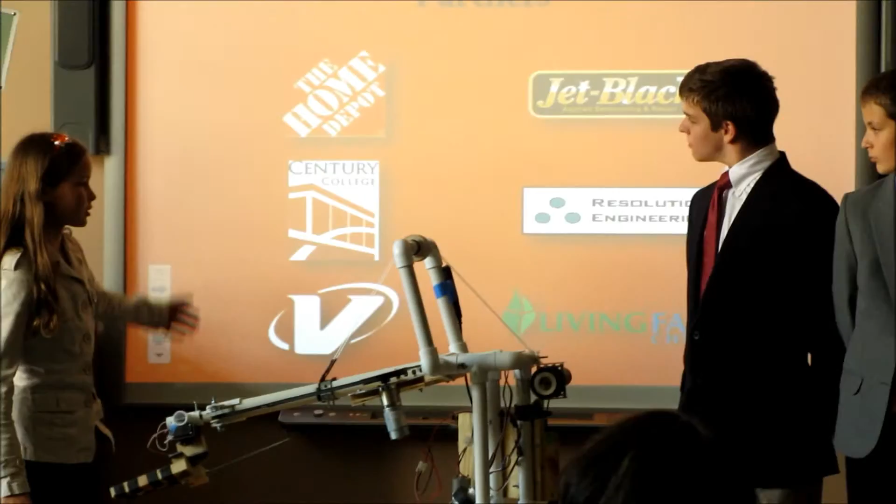I would like to thank our sponsors for their generous donation. We appreciate that they believed in our goal of providing a quality product for you, the customer.

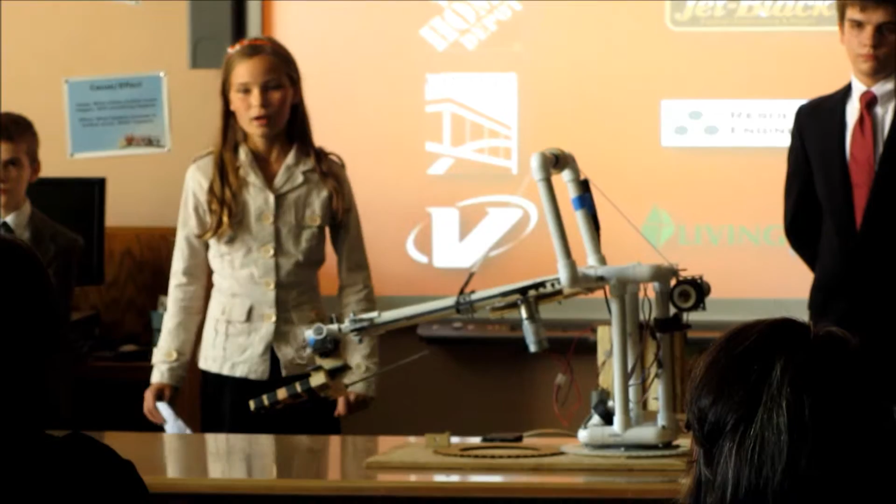To share our enthusiasm for the BEST program, we held an open house. Our advertising on homeschool websites, as well as emails to local public and private schools, and word of mouth, family and friends provided us with a large audience. We use this time to show our booth and robot, as well as technology we have learned, such as CAD and website designer.

Through this event, we recruited 4 new members who are with Archer Robotics for this season. We found that there was interest in beginning another team in the Twin Cities area. We met with the mentor and told him more about the program, and soon he had gathered enough students and mentors to start a new team. We are proud to say that Servotech is here today, competing as a rookie team.

Team organization is an important part of any company. Thus, we began organizing as soon as we knew we were going to have a challenge. We first elected a CEO to oversee the company. This person would make sure all tasks were completed in time.

We then also chose leaders of the individual departments, engineering and marketing, similar to the CEO, but specialized in their respective departments. Individuals were also assigned to the different sections of the BEST Award: notebook, booth, spirit and sportsmanship, presentation. These individuals made sure that we would have a well-run company.

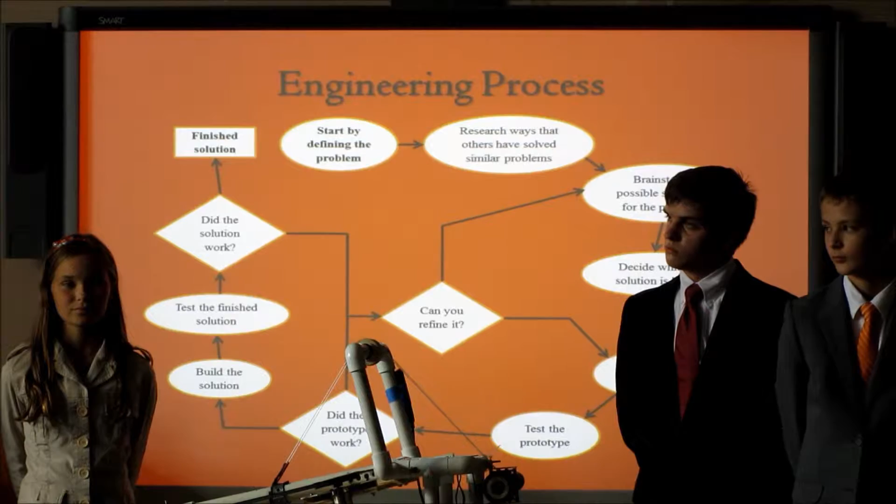We have learned through the past that the engineering process is a great tool to use in order to effectively build an efficient robot. We began immediately after receiving the specifications of our challenge from BEST by defining the problems. We sat down and wrote all the different problems we would have to overcome. We then brainstormed on various solutions to the problems.

Any solution that came up was written down, whether perfect or not, as even the most unorthodox of ideas can lead to a game-winning solution.

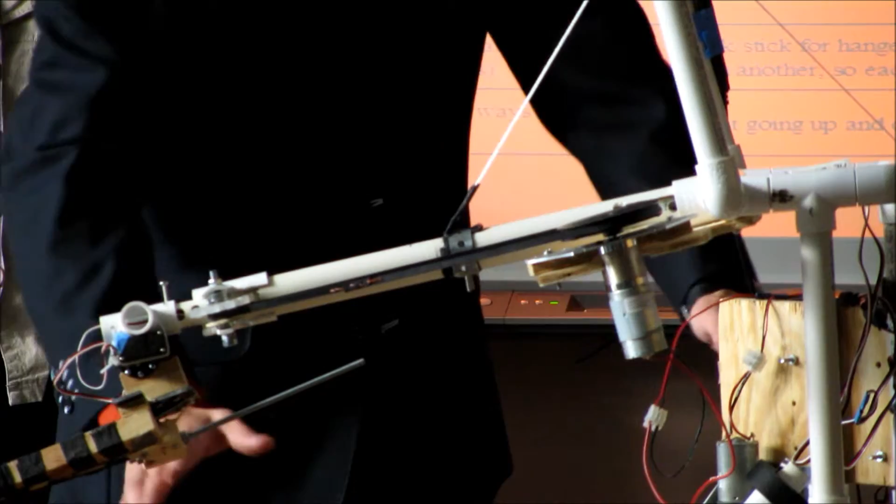We eventually developed a basic plan for our robot. We had a large flat base on which our robot, in the basic form of an arm, was mounted. Our large base size allows it to remain stabilized when sitting on a table like this. At the end of our arm would be some sort of gripper in order to manipulate the various items.

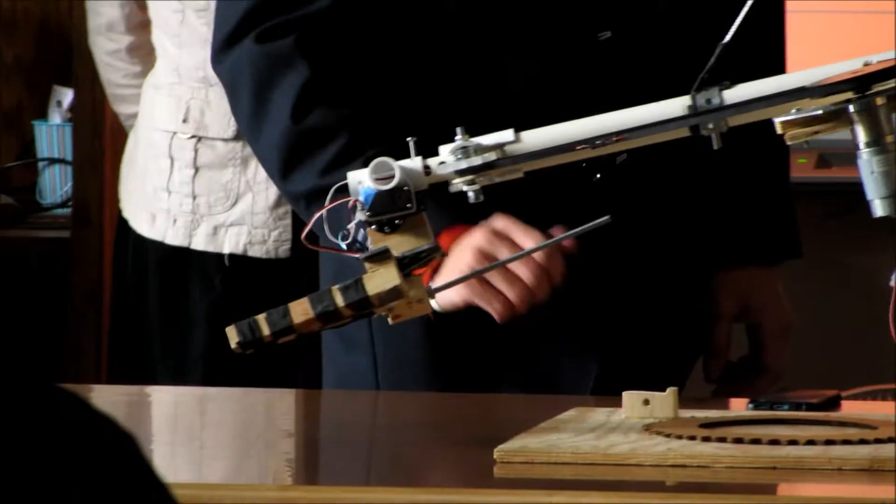The first thing we developed was a way to turn. When we were contemplating how to make a robot turn, there were two ideas floating around that could solve this. The first one was not favored highly because it would not be that efficient. That idea was the use of a rubber wheel attached to a motor. The reason this would not work is that the rubber wheel still had potential to slip and thus would not give us the results we wanted.

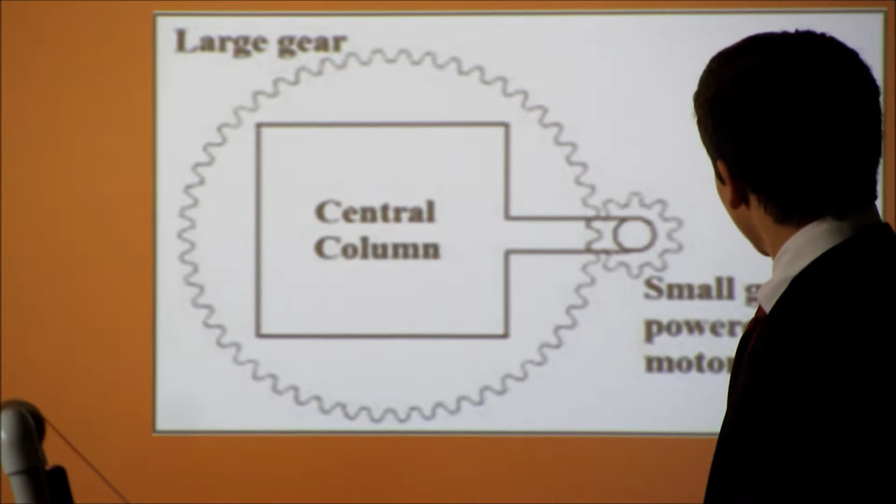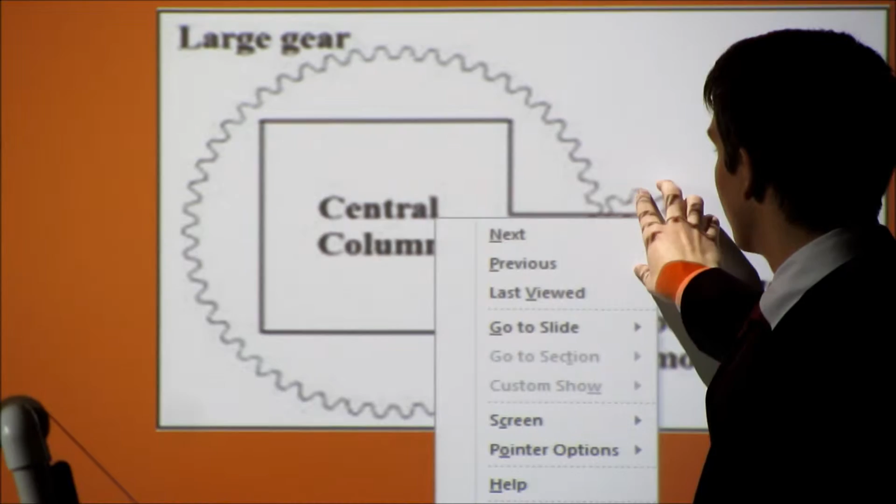The most efficient way we thought of was the use of gears. This is a basic outline of the design for our turning system. We have a motor attached to a smaller gear, which then runs against the teeth of a larger gear, and since our robot is attached to this gear, the robot will turn around with it.

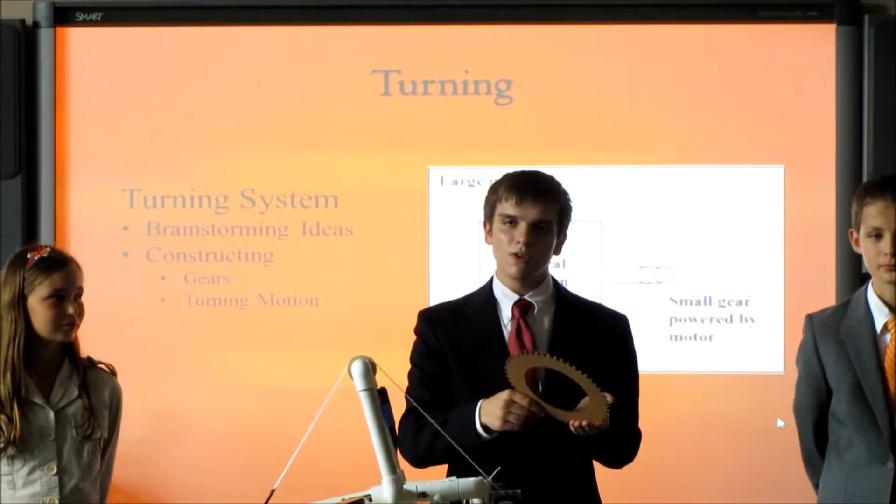There is a major problem that can arise when producing gears, and this is one of the main cons we saw. If just one of the little teeth on a gear is slightly wrong, you might as well have not made it, because it is useless.

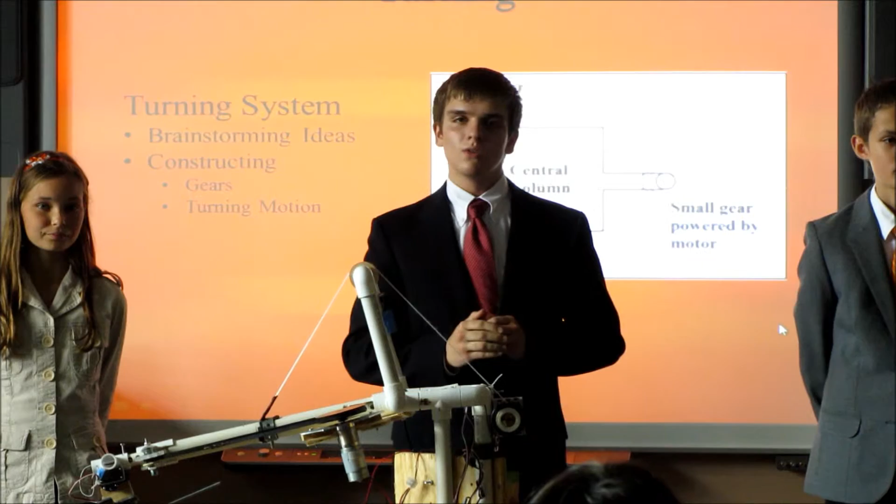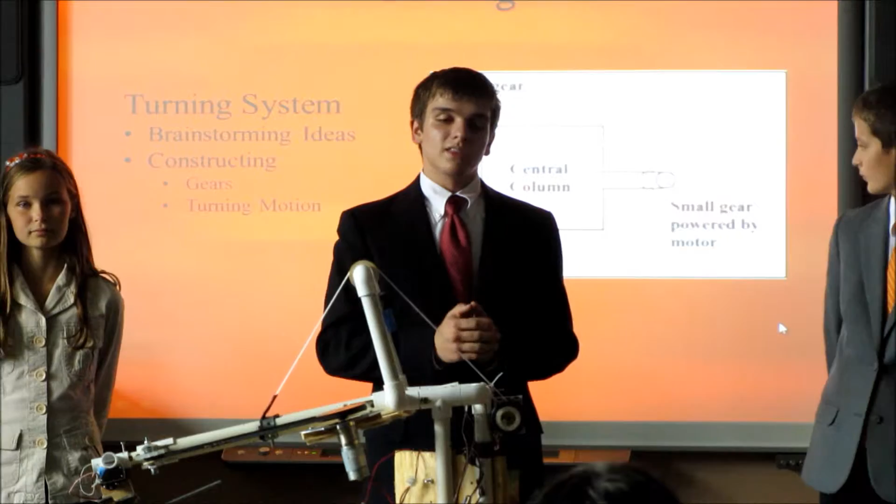However, one of our teammates had access to what is called a shopbot, which is basically a router controlled by a computer program so that it is as precise as can be, and we can set it to whatever format we want. After we got the gears cut out of polypropylene, this is the design we ended up mounting it on.

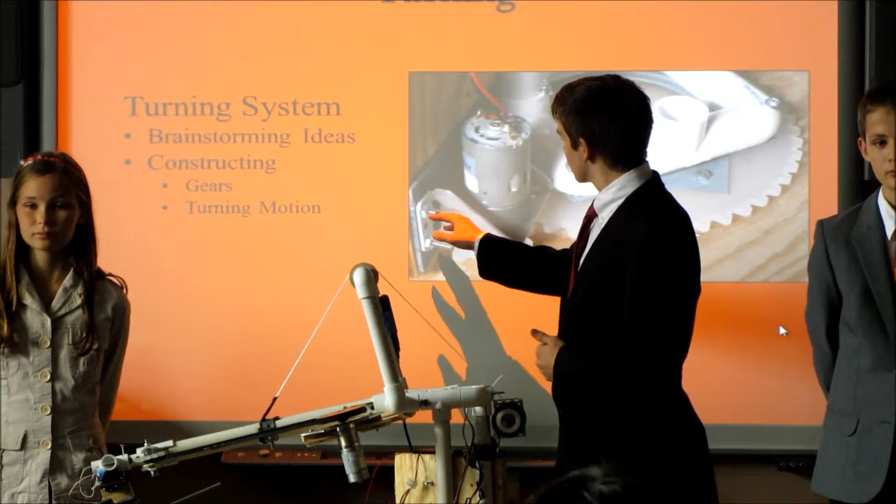As you can see here, we have our motor attached by the metal motor mount to the wooden board on which our battery and cortex are also mounted. Mounted onto this motor is our smaller gear, which, as the teeth move, runs in between the teeth of the large gear, causing the robot to turn with it, giving us the most efficient form of turning motion we could make.

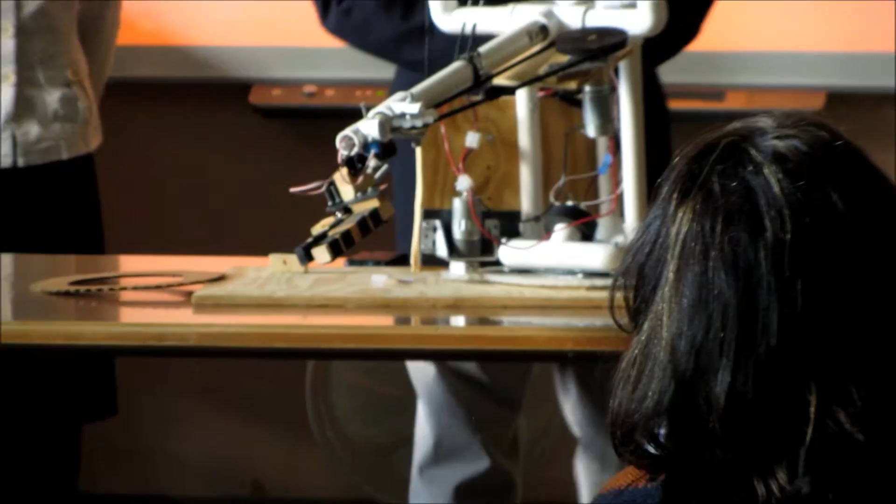Now for the base, there were a lot of ideas we had, but two showed the biggest potential: one was a plywood box, and two was a 3/4-inch PVC frame. To choose between them, we looked at the pros and cons. The plywood box was easy to mount to the turntable, but had weak joints and was difficult to make. The 3/4-inch PVC tube had strong joints and was easy to make, but was hard to mount to the turntable.

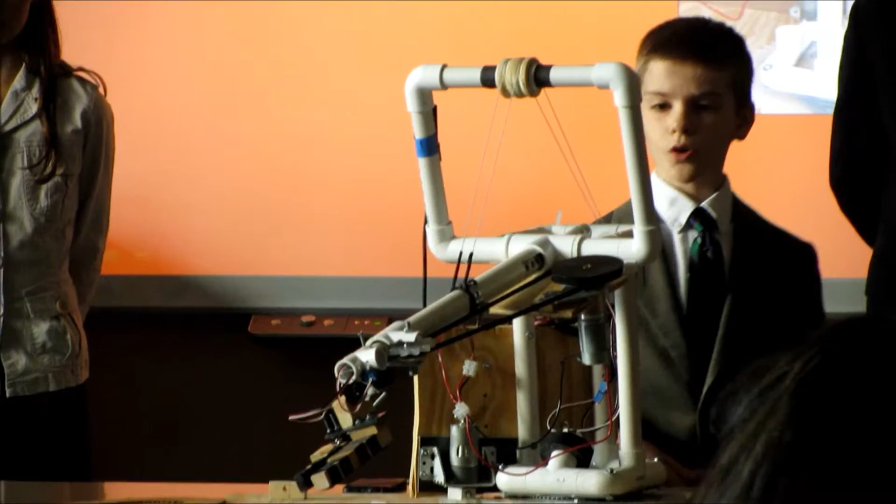We decided to go with the 3/4-inch PVC frame because the pros outweighed all the cons, and the cons were easily worked around. We also decided to put a battery and cortex onto the base, but since we chose the PVC frame design, this would be difficult. So we attached a piece of wood to two of the posts, which would not only hold the battery and the cortex, but also a small motor used for turning, as mentioned earlier.

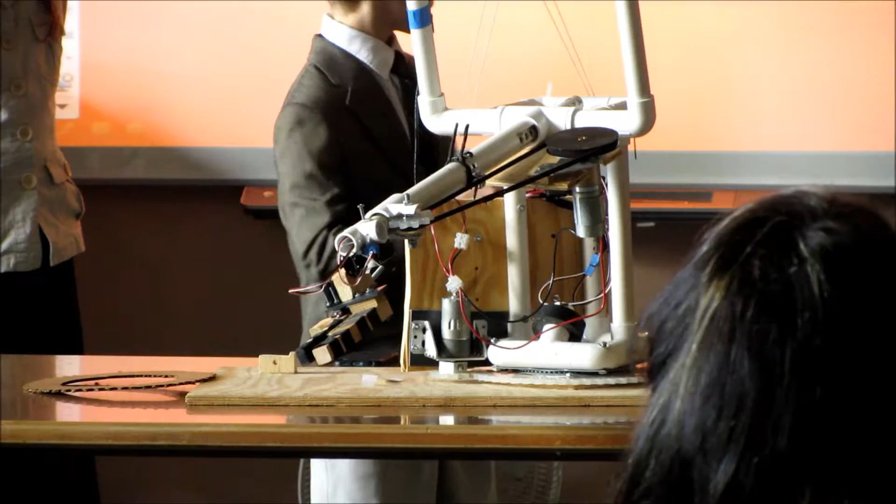Now for prototyping. For prototyping, we just make sure we got the geometry right, and that there are no wacky angles.

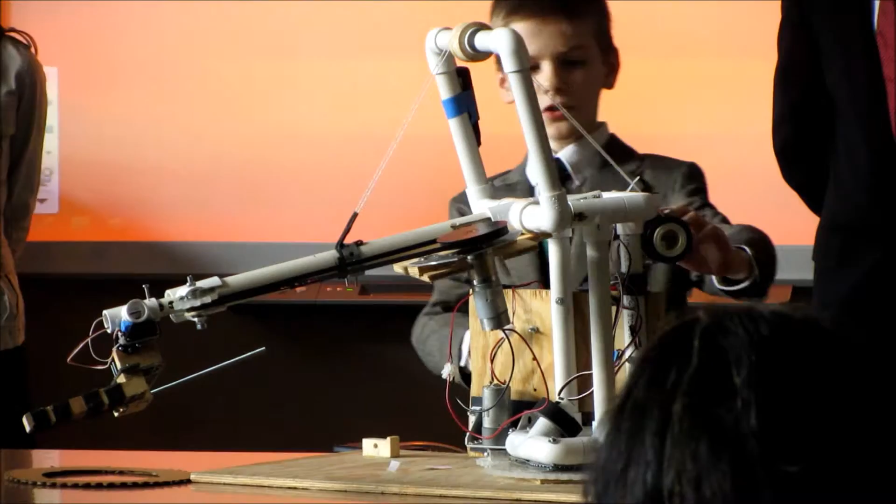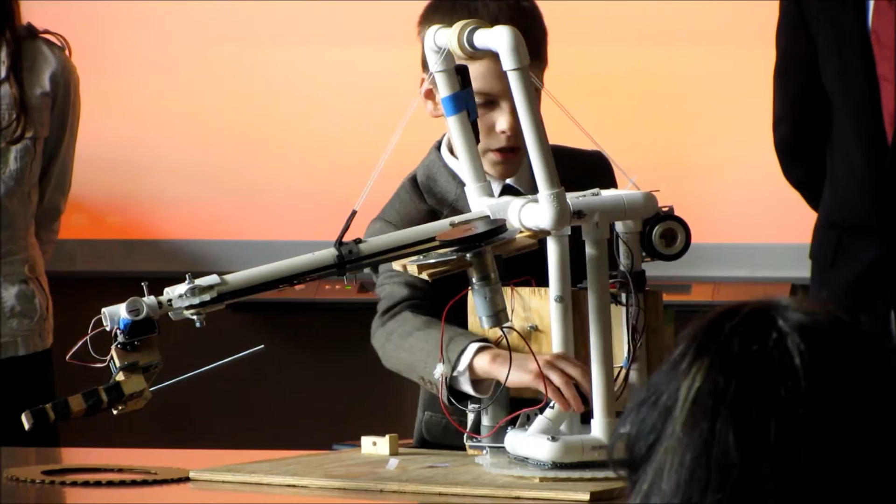For constructing, we cut plugs to connect the elbows and T's, and we cut 3/4 PVC tubes to make the individual posts. We also made a few special things, like a hole to hold a tool so we can tighten motors, and a little stub so we can hold friction tape, to add to the gripper or any other places that need it.

To assist in reaching the scoring locations of this game, we designed an arm with 3 degrees of motion. The first, a turning motion, was discussed earlier. The second is a winch-like system that raises and lowers the arm. And the third is a sort of telescoping extension motion.

For the winch system, there were many ideas. Using simple mathematics, we figured out that a crane with a drum that wound up a string going over a top pulley, down affixed to the arm, would be the most efficient and robust way to do it. When the motor turns, the arm gets raised by the string.

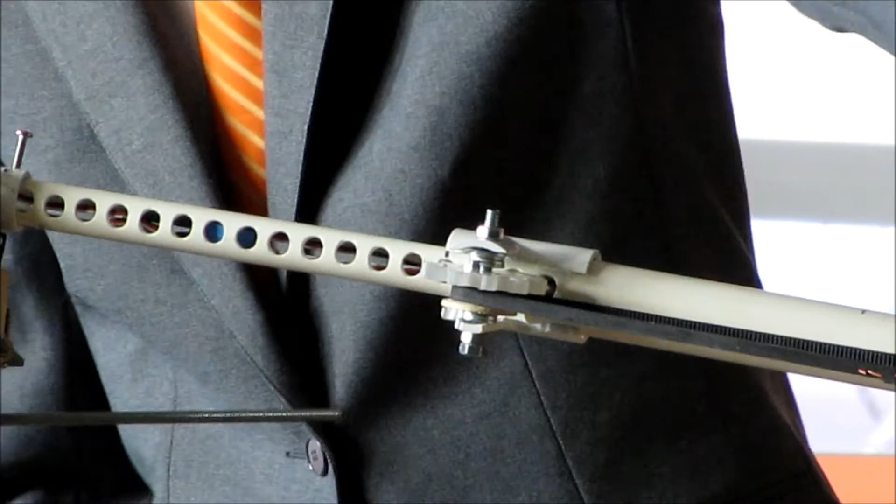The third motion was a lot more complex: the extension. The basic idea is to have a gear that engages holes drilled in the inner pipe, so when this motor turns, it turns the belt, which goes to a smaller pulley out on the end of the arm, so we don't have so much weight and therefore more torque on the arm. When the motor turns, the arm extends, allowing us to reach all of the 42 inches required to get to the farthest CPU memory.

Also, we added a slot in the back of the PVC so that the gripper would not rock back and forth. We put a machine screw into the slot, keeping it sturdy and reducing weight without sacrificing much strength.

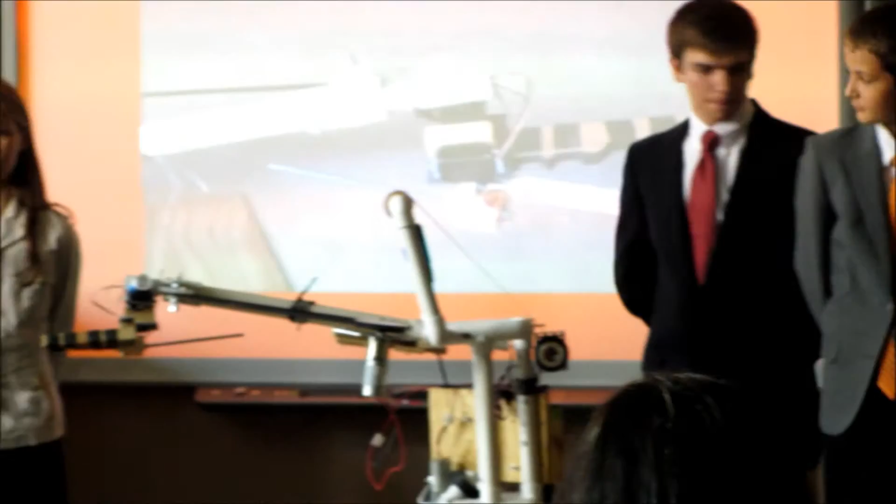Thus far, we have discussed the various motions of our arm, but we still needed a way to manipulate, transport, and place the various items. The basic format of this was to be a gripper, as it would be fairly simple to make. One thing we would like to have had was to have both sides of the gripper close together, making grabbing the items easier and more secure.

However, if we had two separate servos controlling each side, this would double the weight on the end of our arm. Weight was something we certainly had a problem with, as at full extension, even the smallest amount of weight adds a large amount of torque to the motor. We researched a way that could use one servo to close and open both sides.

However, this was somewhat complicated, so eventually we decided to stick with one fixed side and another side that closed into it. This would be easier to line up, and although it wouldn't grab as well, that problem could be overcome with driving practice.

One issue we had was when we grabbed the dowels, they would spin within our gripper, making them difficult to place correctly. So we added two curved indents into our gripper, which would close around the dowels, keeping them straight and in the same relative position to the gripper. We added two of them in order to double our operating efficiency, allowing us to transport two dowels at once.

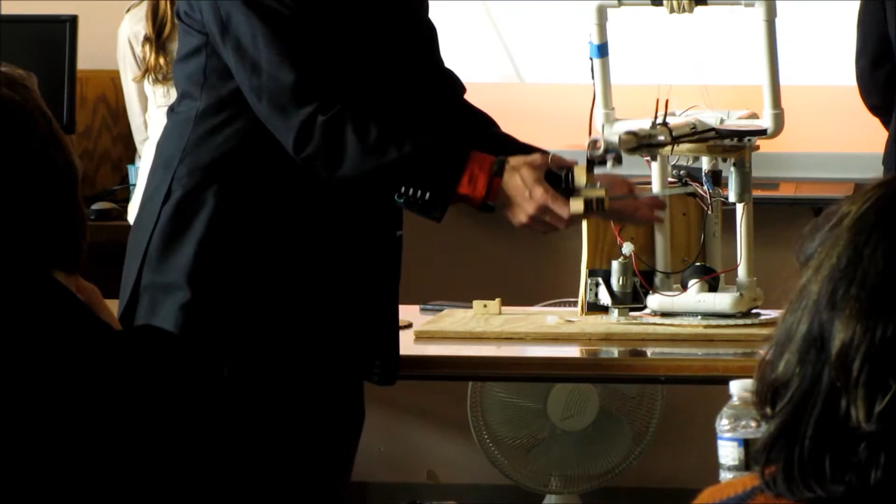Now we still needed a way to transport the hangers. Instead of grabbing them one at a time, which would take quite a while, we used a rod that we would insert into the hangers, lift them up, place them on their scoring pole, and pull them up. This way we could transport up to 5 at once, greatly increasing our speed.

We mounted it on the back of the moving side of the gripper, which let it fit well when we were trying to fit in our 2-foot box, the limitations given us by BEST. Overall, this gripper has let us have a very efficient robot, and we hope to do well tomorrow.

We use many different technologies in the design and promotion of our robot. A few of these include SolidWorks 3D computer-aided design, also known as CAD; Weebly Website Designer, there's a screenshot of our website; and Microsoft Office for the writing of the notebook and promotional materials. In addition, for programming the robot, we used a programming environment called EasyC, and we used the SolidWorks eDrawings program for viewing the CAD of the game field.

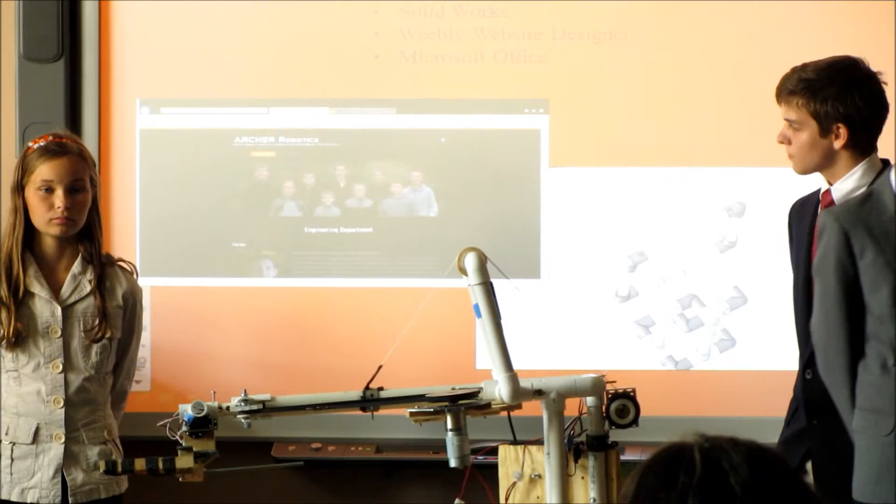When BEST presented the Gatekeeper Challenge 6 weeks ago, we devoted a lot of our time and thinking towards building our robot. And I can say, with our robot Ardia, with efficient turning mechanism, an arm with freedom of motion on the X, Y, and Z axis, and our all-purpose gripper, we've accomplished that and made the best for BEST.